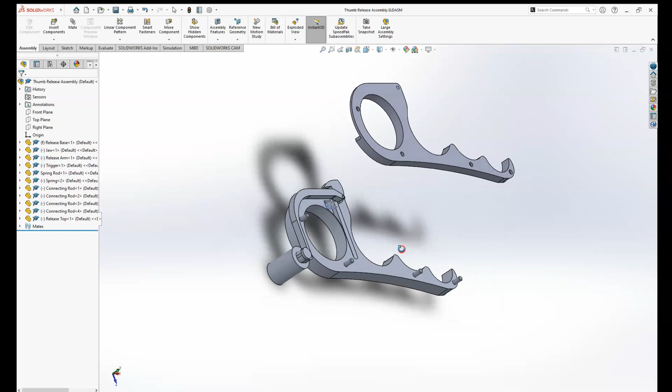So jumping into this design, we can see that it is a 4-finger, so your index finger goes through the closed loop, and then middle, ring, and pinky, where your thumb acts as the trigger on this type of release.

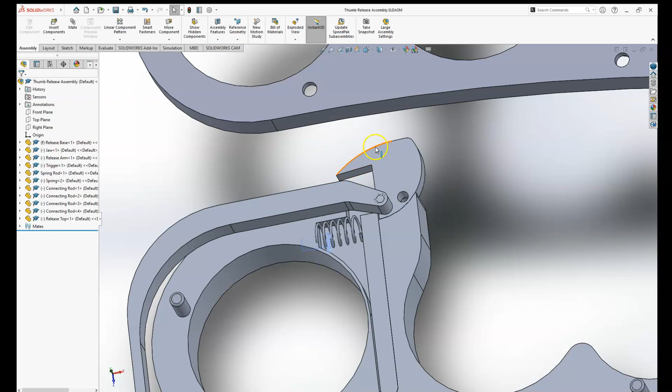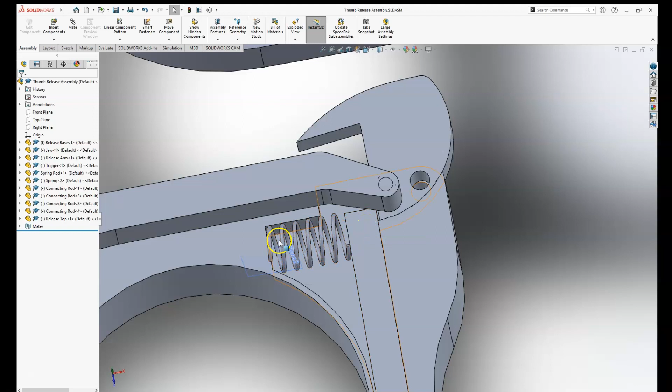So looking at the way this mechanism works, we have the jaw here, where you would loop your D loop, which is connected to your bowstring, right here, and then when enough pressure is pulled back on the thumb, this will swing open as this spring is keeping this bar in place. So when the jaw is then being opened, this will cause the rod to bend and the spring to decompress, and your arrow will be released.

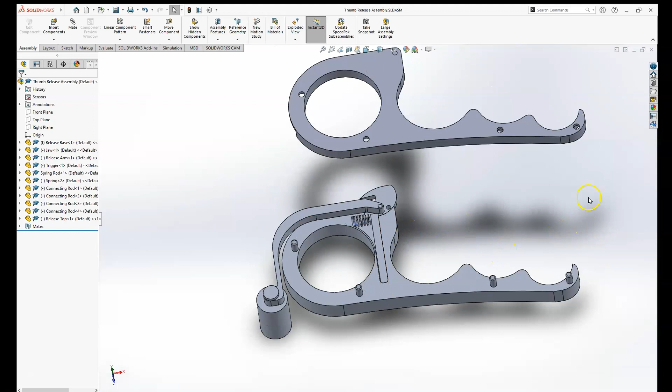So my favorite thing about this project was probably making the spring, just because it's something I hadn't ever done before, and it is, I think, what makes this a little unique. So we can go here and just see how this works.

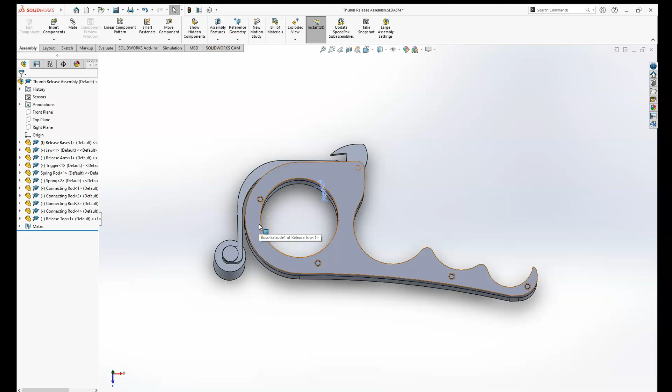So we mate the top to the bottom, and you can see here, this is what the outside and finished product will look like. It is connected through 4 different pins. There is a proper technique when shooting a thumb release, and that is you want it to be a surprise shot.

So what that means is when you are getting ready to fire your arrow, you want the release of it to surprise you. And so how that is done is your thumb will rest right here on the barrel, and you hit your back wall on your draw, so that is when you're not actually pulling any more bowstring back,

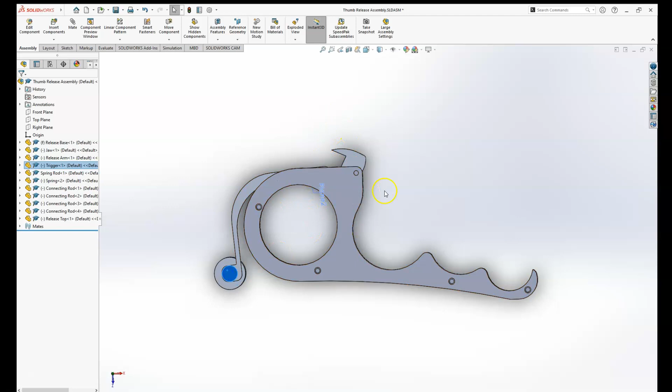but you are at complete full draw, and then you keep just a little bit of pressure and keep going, and then boom, eventually the bowstring will release off the jaw there, and the arrow will be released, and it should surprise you. That is proper form and proper technique, and usually leads to much more accurate shooting.

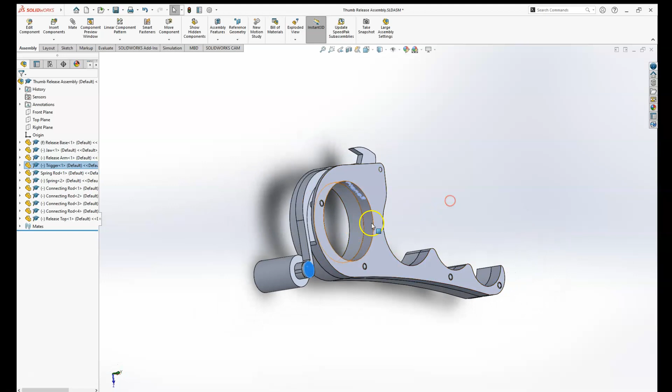So yeah, that is my 4-finger thumb release I made. I drew a little bit of inspiration from Carter releases, and there's also some Scott archery releases that are similar. It is an 11-part design with 8 unique parts, and thank you for taking the time to look at this. This is just a little demonstration of my ability to work in SOLIDWORKS.